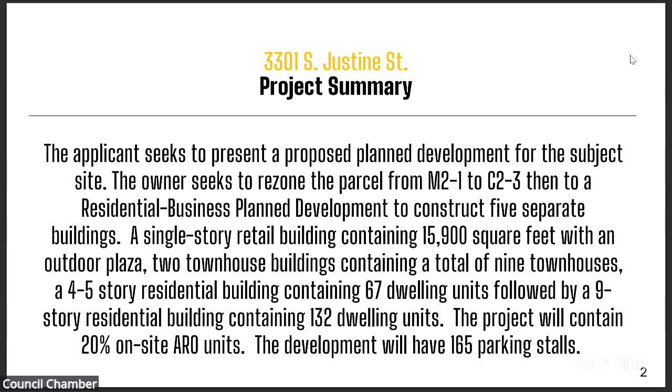Plan development review and approval is required for residential developments exceeding 60 units of multi-unit or mixed housing types in a C2-3 district. The subject site is located in the McKinley Park community area, which has a population of approximately 15,400 people. The site is currently improved with a vacant industrial warehouse and associated surface parking. The surrounding land uses include light industrial to the east and south, commercial to the north, and residential to the west.

The site is approximately within half a mile of a CTA Orange Line station and is served by CTA bus routes along South Ashland Avenue and West 35th Street, qualifying the site as a transit-served location. The site is not located within an industrial corridor as defined by the Chicago zoning ordinance.

I'll now turn the presentation over to the applicant team to discuss the details of their proposal.

Good morning, Commissioners. My name is Tyler Manic. I'm an attorney with Schain Banks, Kenny and Schwartz, the land use attorney for the applicant. Before going into the slides, I wanted to take a quick moment to introduce the development team. To my left is Ben Kennedy with Kennedy Mann Architecture, who will shortly share the design of this project. Also with the project development team is Sharon Wong. To my right, Jack Chongus with the development team, and Luay Aboona with KLOA, who will act as our traffic consultant and will be available to answer any questions at the conclusion of this presentation. So with that, I'll turn it over to Ben Kennedy.

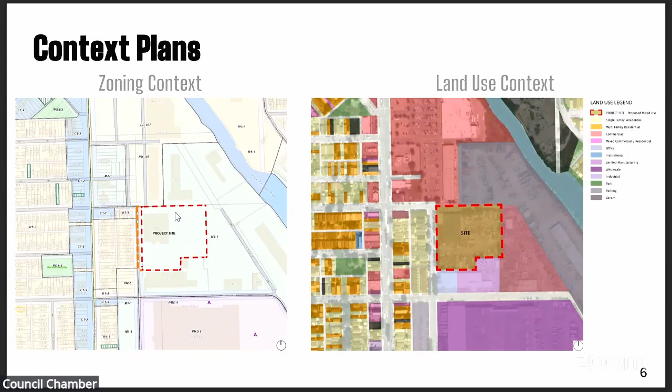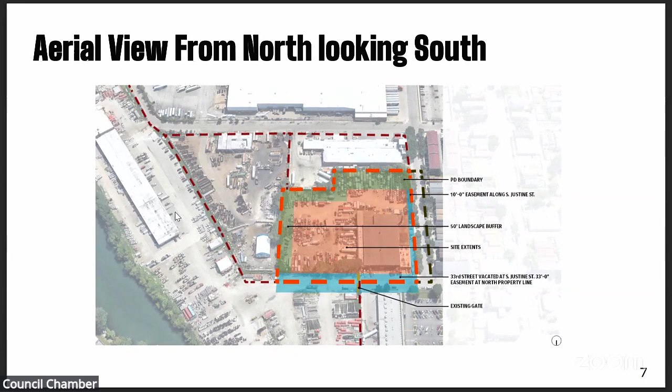Again, Ben Kennedy, Kennedy Mann Architecture. We're the architects for the project here. Here's an aerial image of our site looking from north to south. We have a 10-foot easement along Justine, a 33-foot easement along 33rd, and we're going to have a 50-foot buffer along the south as well as the east of the site. From a site context plan, our site overall is about 232,000 square feet. We have single families and 2-flats across the street along Justine. This plan and all other drawings in this presentation have north facing up. We have retail and manufacturing to the north, as well as manufacturing to the east.

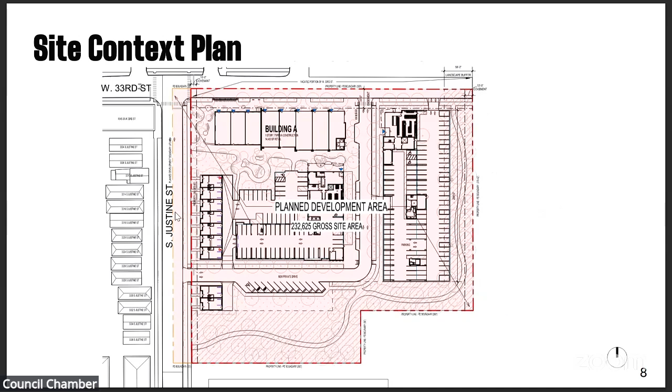So the revision now has a height characteristic more fitting of the neighborhood. Along Justine, we've taken away the parking, and there's no retail along Justine. We have 9 townhouses directly across, and those townhouses are a typical 3-level townhouse, roughly 28 feet high. That starts to mimic some of the heights we have on the west side of Justine, where we have singles and 2-flats. We've gone down to 1 retail building at the north, but we've also pushed it off the property to have a landscape buffer at the corner.

And then we've gone down to 2 residential buildings. The L-shaped building in the middle is a 4 and 5-story building, and to the east is a 7 and 9-story building. So both of those buildings step as they go up. Additionally, we ended up including a 50-foot landscape buffer to the south and to the east, and we added more property into the project on the south to have an even larger landscape buffer along the south.

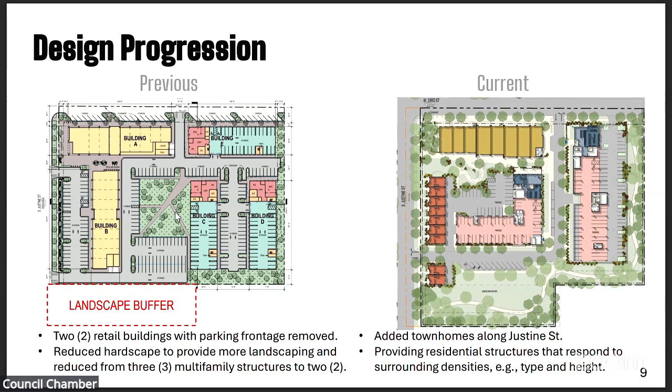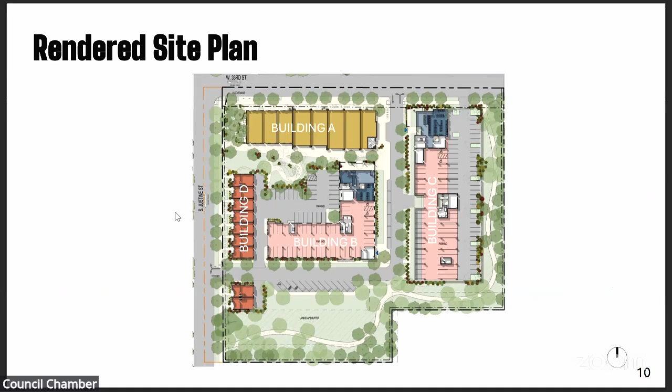This is again the proposed plan. We have building A as our retail, building B is our 4 and 5-story residential, building C is the 7 and 9-story residential, and building D are our 9 townhouses along Justine.

From a conceptual rendering perspective, this is at the north side of the site. In the foreground to our right is the 1-story retail. Directly south is a 4 and 5-story residential building, and to the left is the 7 and 9-story residential building. All residential or condos as well.

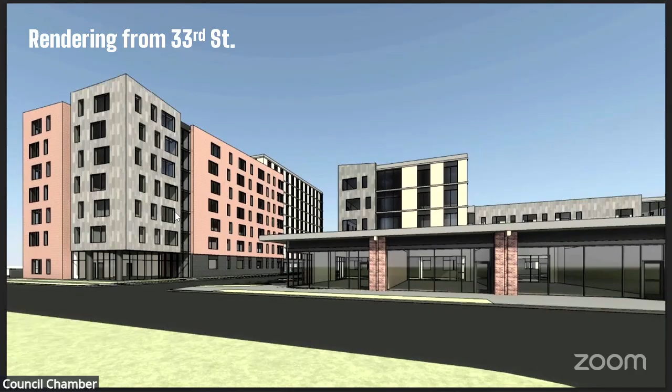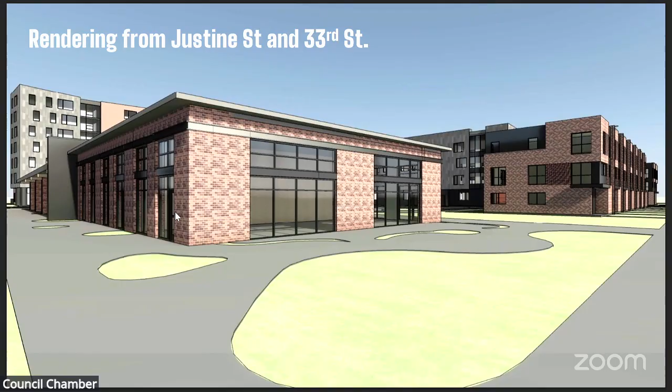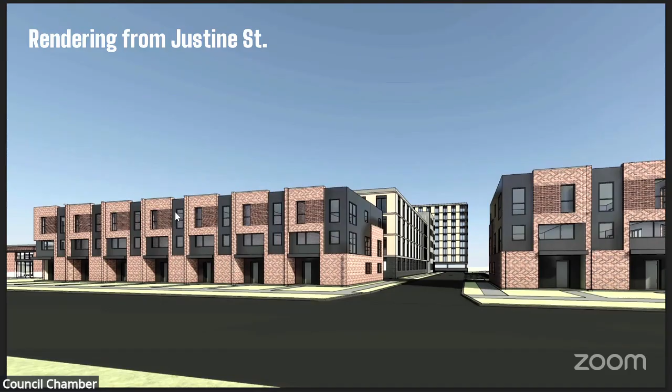This is along Justine. These are our 9 townhouses. This view is taken from essentially the parkway of the existing west side of Justine, with the existing 1 and 2 flat type of buildings. Part of the goal here was to make sure that we're hitting height characteristics, so again we have townhouses where we are lower and progress in height as we go to the east.

This is just a clip to show the height progression to the right from a sight line or height perspective. To the right is our existing buildings along Justine. This image is taken from the north, so you'll see the low 1-story retail in the foreground, and then to the far left or east is the 7 and 9-story.

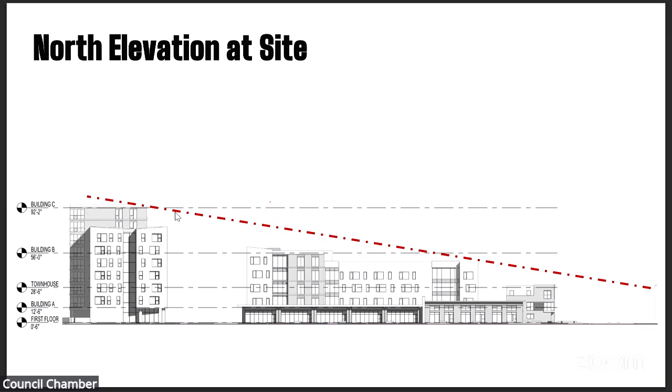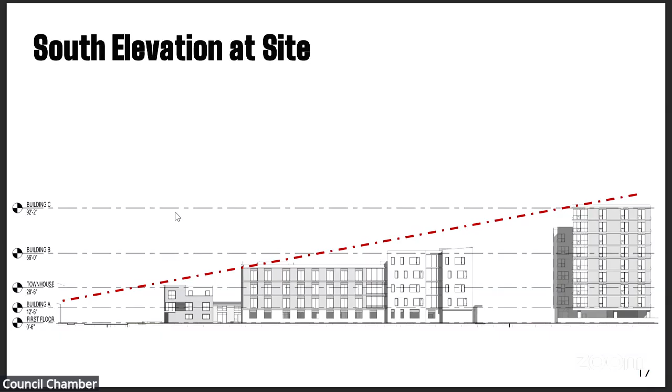Opposite view, south view, and now our existing 1 single family and 2 flats are along the left side of the screen, progressing to the east, hitting the 9-story. And then our east view of the 9-story.

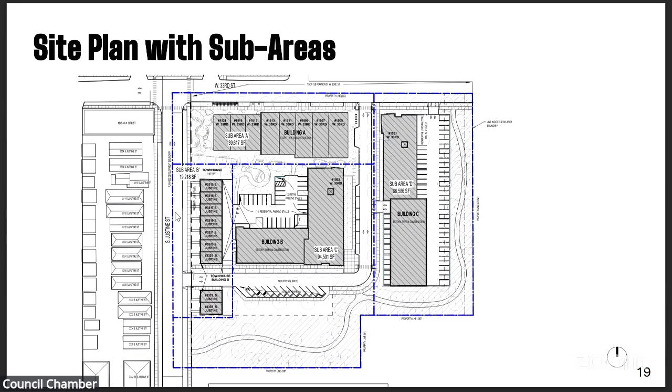Sub-area A would be our retail, sub-area B are the 9 townhouses. Those 2 are going to be built first. Then sub-area C is the 4 and 5-story building, and sub-area D is the 7 and 9-story building.

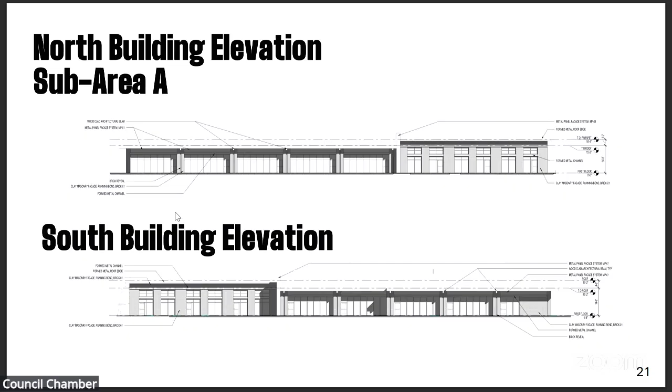Just some quick views, plans of the retail, roughly 1,800 square feet per space, a little over 14,500 square feet total square footage for the retail. The height varies in the retail, 14.5 to 18.5 heights.

More retail. And then our townhouses—we will have ARO, and all the projects Tyler will talk about a little further in the presentation. We haven't yet designed the townhouse layouts, but on the lowest portion of the slide is our first level with parking, and then second and third level. Each townhouse is roughly 2,400 square feet.

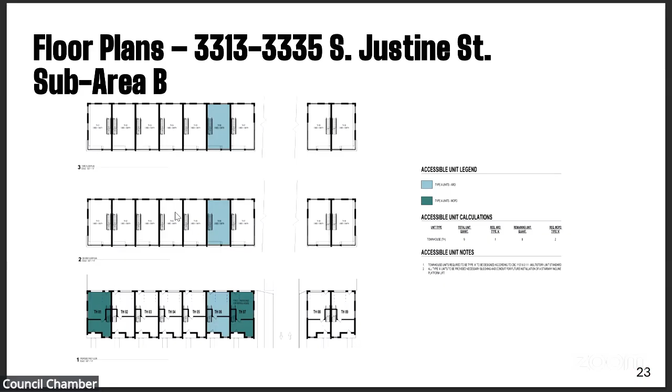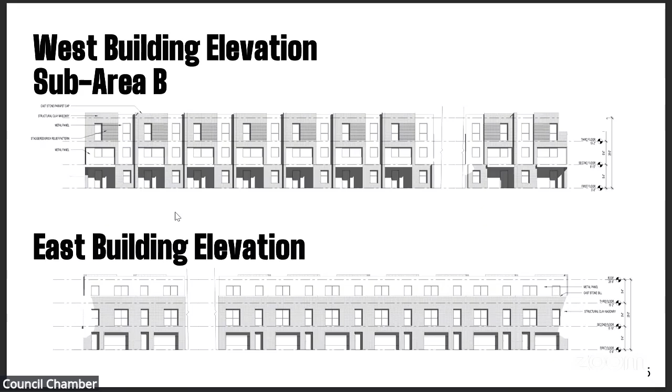Some elevations of our townhouses overall, mostly masonry and composite paneling. We'll be parking along the rear on the east side.

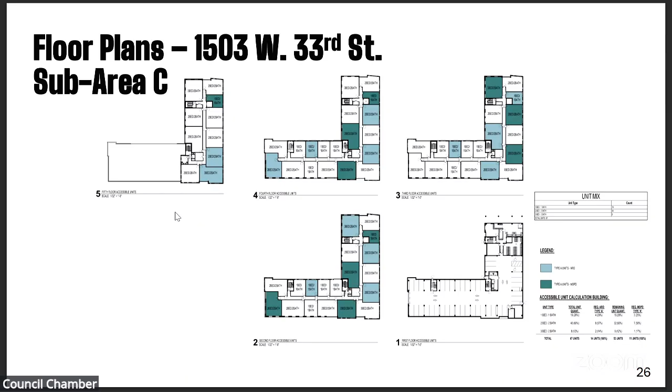Our 4 and 5-story building will be parking under on the first level. We'll have parking, 3 full levels of residential. Then on our 5th, we will pull back 1 leg, which is on the west side of the building, and our north-south leg will remain at the 5th level. Again, we're at 67 units for the 4 and 5-story building.

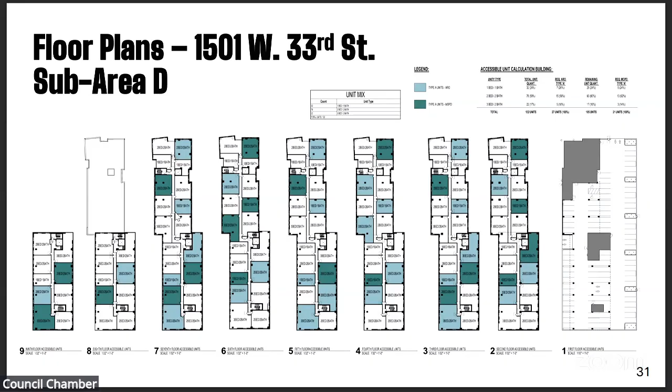We'll have 6 full levels of residential. Then we'll get up to the 8th level where we'll pull back part of a leg at the northern side, and 2 levels continue up at floors 8 and 9.

As far as materials, all the buildings will be designed in a similar character, a lot of masonry with metal panel. We'll have at least 2, if not 3, different colors of brick, as well as 2 to 3 different colors of panel throughout the building.

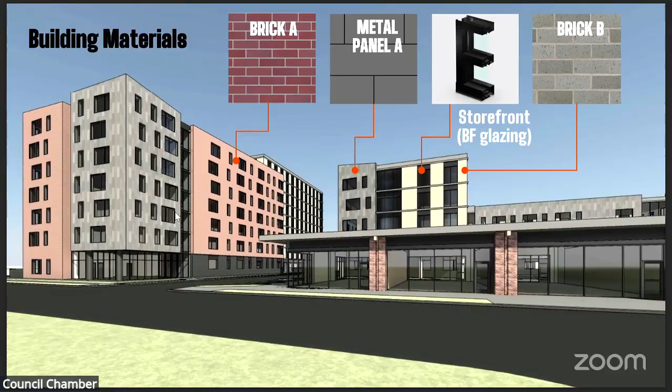Majority of the building would have typical storefront glazing, bird-friendly glazing as well. Same on the retail, as well as the townhouses.

From a transportation perspective, part of this is being a TSL development. Our closest TSL stop is along Ashland and 33rd. We will be improving the sidewalks from that intersection to our site, so we'll have new sidewalks. We'll have an APS system put at the intersection of Ashland and 33rd, as well as a new bus stop.

We'll have 12 Divvy bikes to the north side of our retail building. We'll have 208 dedicated bike parking on the overall site, with 165 parking spaces, plus additional roughly 18 to 19 guest parking throughout.

There's loading for the retail building, and there's also loading for the 2 residential buildings.

And last on this site from the open space, we will have the landscape buffer along the east and the south portions of the site.

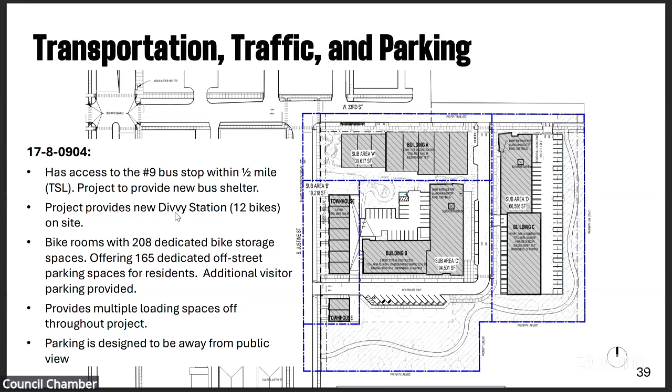From a planning context, the project targets underutilized infill sites, promotes ownership and housing choices, fulfills equitable transit-oriented developments, and expands retail diversity and services.

From an urban design perspective, the project utilizes landscape buffers for public health. Again, we have a 50-foot buffer along the south and the east.

We also have landscape buffers between the retail and the quad area, between the retail and the townhouses and Building B, the 4 and 5-story. The retail is pushed to the east, so we have a landscape buffer at the west end.

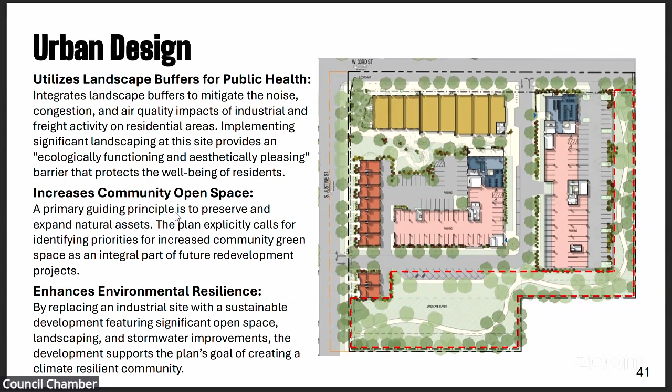There's been a traffic study done by KLOA, who are here to speak on traffic if need be.

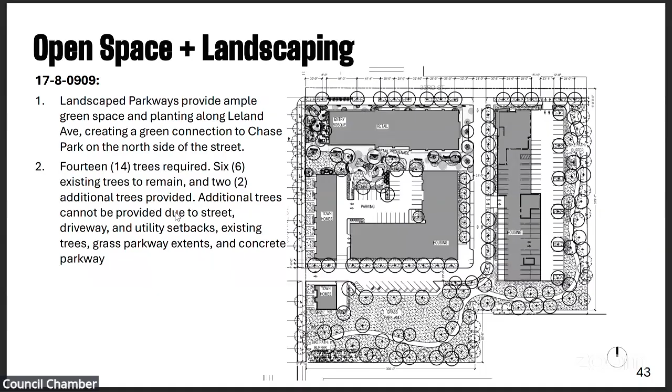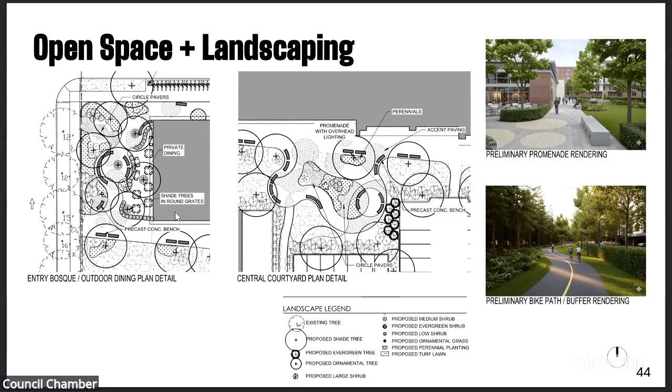More landscaping details put together.

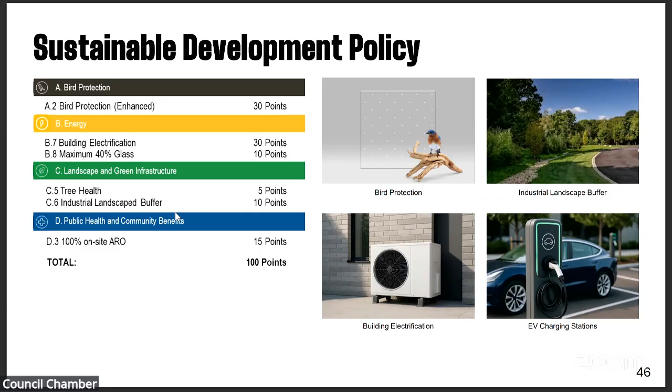From a sustainability perspective, we will have bird protection enhanced for 30 points, building electrification, full electrification for 30 points. We'll maximize glass at 40% for 10 points, tree health for 5 points, industrial landscape buffer for 10, and 100% of the ARO on site for 15, to gain our 100 points.

Stormwater, of course, we will be in full compliance with the stormwater ordinance as we get into the design. And I'll let Tyler take over.

The applicant team already owns this property, and they already have committed equity to the project, as well as been in regular communication with their traditional institutional lending partners, who are awaiting final approvals before they can formally commit to construction financing. But the intent is upon approvals to get immediately started with this project and move towards construction within a 2-year period.

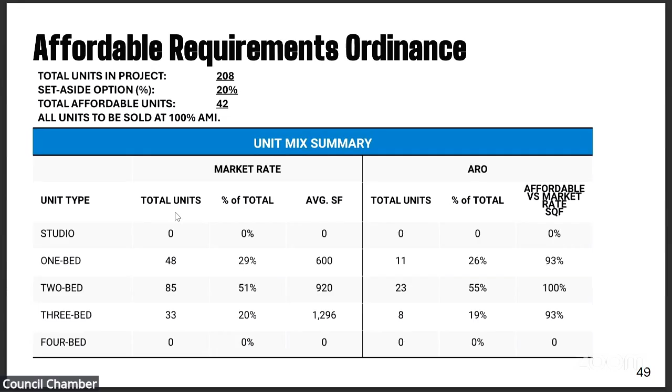The community process was robust. McKinley Park Development Council is an active community organization in this area. The community process started with meeting with the Alderwoman and her staff, who followed up with the introduction to the McKinley Park Development Council, where we conducted site visits and engaged in community meetings with the organization. Got their input, incorporated their input to the project, and then followed that up with a general public community meeting, with notice being sent to residents within 750 feet of this location.

The community meeting was well attended, and for a project of this size in this area, it was very positive. The feedback that we received was all feedback on how to improve the project versus criticisms. The constructive feedback that we received was also incorporated in this project, and we're really proud of the opportunity that this project brings to the community, and I believe the community is as well.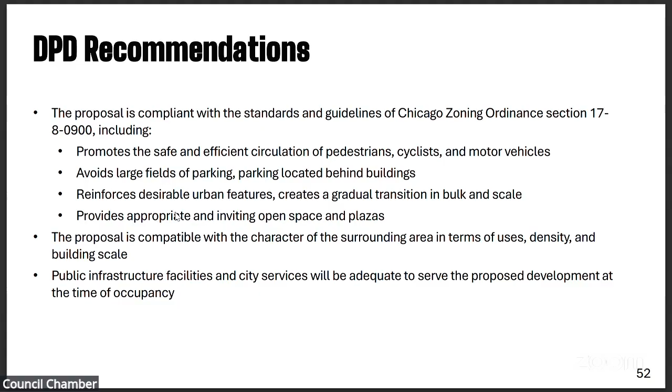Thank you, Omar. Let the record reflect that Commissioner Ramirez Rosa is in attendance now. We do have two speakers signed up to speak on this item. The first one will be Mr. Butler Adams, who's for the proposal, followed by George Blakemore, who's against the proposal.

Yes, for the record, my name is Butler Adams. I am in favor of this proposal. I got a chance to go to the community meeting last year in April about this project, and I was for it then, I'm for it now. Building on land that is currently generating very little tax revenue is a good thing. This project will add to the built environment of the area and add a diverse housing environment to the area as well.

In terms of the architecture of this project, I know it was mentioned that the mid-rises are going to use different color bricks. With all these townhomes, it would also be nice if you use different color bricks for the townhomes, just so they have a little bit of visual diversity. One of my running jokes is, if you go home drunk, you're not going to know which one is yours because they all look alike. So having a little bit of diversity in the architecture of the townhomes, I think, would certainly be beneficial.

It was mentioned that over about 10 years, this overall build-out project is going to generate about $20 million, so that's $2 million a year. That's a good thing. Let's see.

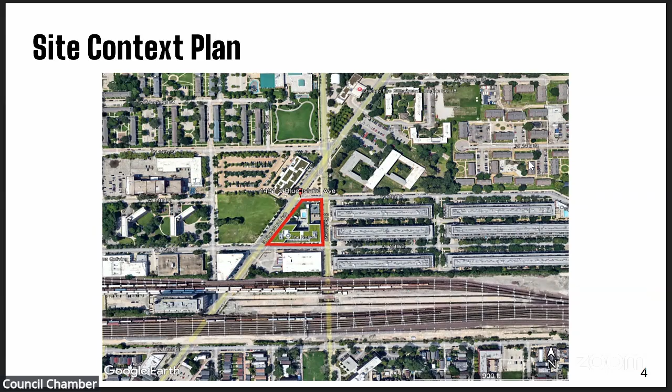The surrounding land uses for the area are primarily residential and commercial. The surrounding zoning districts for the area are planned development, C1-2 Neighborhood Commercial District, B3-5 Community Shopping District, and M2-2 Light Industry District. At this point, I'll turn it over to the applicant team to discuss the proposed PD amendment on the following slides.

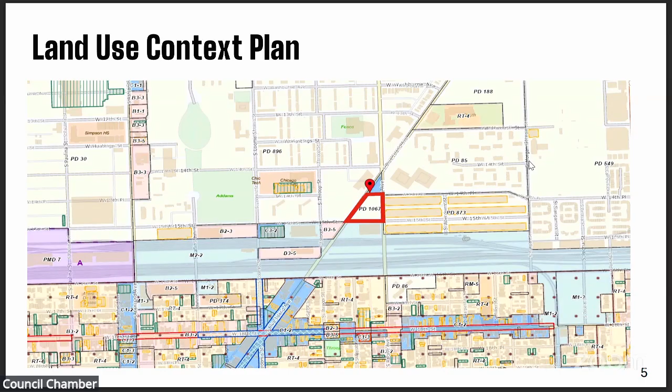Thank you, Louis. Good morning, members of the commission. My name is Lenny Asaro. I'm a partner at the law firm of Taft, Stettinius, and Hollister. I represent the applicant, Cedar Street. Along with me today is a representative from Cedar Street, Andrew Berry, an associate with the owner of the property.

As indicated, this is PD 1067. The original PD was approved in 2007. There was an amendment last summer, thank you to the Plan Commission and City Council. That amendment allowed for the activation of the retail space at 14th Place and Blue Island. That space, I believe, is going to be opening within the next few months, and that's going to be a beverage and liquor store with a tasting room, a tavern, and a patio. So that's going to be soon activated.

The net site area has been indicated as 54,027 square feet. There's 202 dwelling units in this building, otherwise known as the Rosie. There's 132 parking spaces. Next slide.

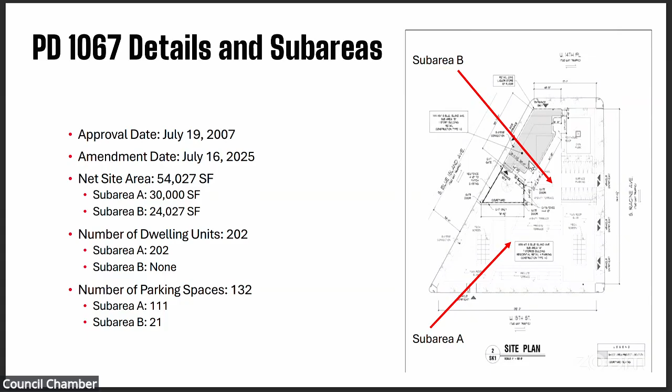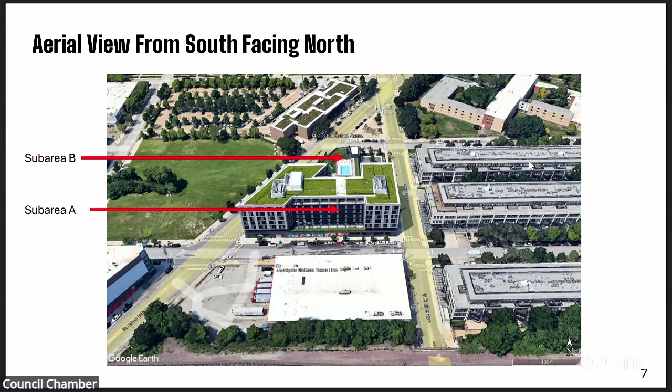The next slide is an aerial view, south facing north. The property is divided into two sub-areas, sub-area A and sub-area B. The amendment today involves both sub-areas in terms of adding uses, but there's one more vacant retail space, which is in sub-area A. So at the corner of 15th Street and Blue Island, there's one vacant space. The next slide is an aerial view from west facing east, again showing sub-area A and sub-area B.

Next slide is a pedestrian context. This is the northwest corner of sub-area B. What you're seeing here is the space that is going to be activated very shortly with the liquor store, the tasting room, and the patio that fronts Blue Island.

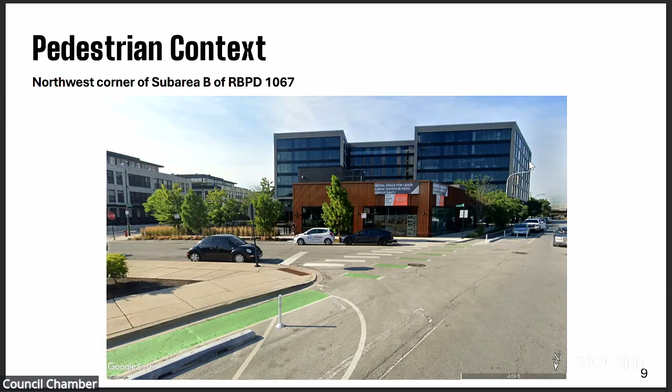Next slide is a pedestrian context from the southwest corner of sub-area A. This is the space right now that is not activated. The good news is that the owner is in negotiations, hopefully close to concluding, with a dental office that would be occupying that space.

The reason for this particular amendment was to add uses that are already permitted in the underlying zoning district, to really basically give the building, the property owner, and the community more flexibility, so that when tenants do surface or are interested in the space, it's going to be a lot easier for the property owner to lease this space. There was difficulty before, which is why we had to come before you last year, and now we're trying to basically correct all that to keep these spaces activated and occupied.

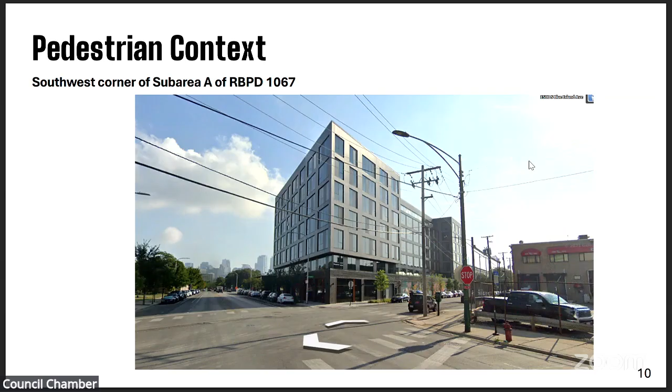We appreciate the alderman's support of our amendment last year, and it's my understanding he submitted a letter of support this year as well.

Alderman Sigcho-Lopez. This is just the site plan that's already part of our PD amendment that was approved last year.

With respect to community benefits, at this point, since we don't have a tenant under contract, we don't have any total project costs. It's going to be a dentist office. The build out certainly won't be to the level in cost that was necessary for the other space that's going to be activated soon, but there's every desire and commitment to meet the levels for this particular project.

And I believe that concludes my presentation. Thank you for your time.

Thank you. We do have one speaker signed up to speak. He may have stepped out. Mr. George Blakemore? He stepped out, right? Okay.

Then I will open it up to the commissioners. Are there any questions or comments on this item for the staff?

Yeah, Commissioner Curtis? I just want to, I'm sorry, could you point out the area where the dentist office was going to be?

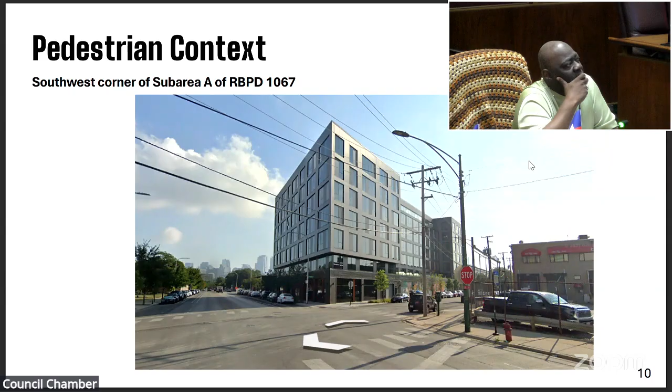Absolutely, Alderman. This is the southwest corner of sub-area A. So this space right along here, which fronts Blue Island, is kind of almost at the corner.

Any other questions? It's about 2,000 square feet. Yeah, I grew up in that area, I know the building well. Okay, all right, thank you.

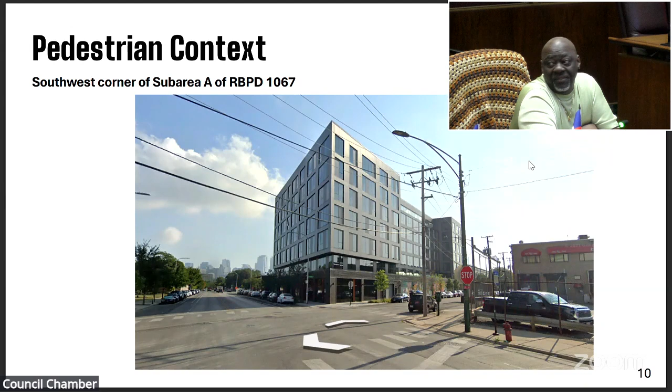Great. Mr. Blakemore, we did call your name to speak on this item. Would you like to do it now? Thank you.

This developer and development. I put on Facebook by 3 a.m. this morning how rich Chicago is and the population is increasing. Oh, she's rich, but I use some other language, other terms. Sitting on Lake Michigan, the Chicago River, a global city, a rich city. People come to Chicago for their sports and everything. Chicago is rich. Go to the ghetto, go to his ward, go to the ghetto, and do you see any economic development there? Stop beating up on these white folks, they are part of your kin folks. Beat up on these blacks, beat up on these black faces in high places selling black people out. Stop beating up on these white folks, they are still your kin folks. Beat up on these black ones, beat up on them. And community involvement? No. Where's the people from the community here? You said you have community participation, where are they? How many people attended these community meetings? Where's the alderman's people? Why don't you mandate that someone come to the Chicago Planning Commission? The alderman must be present, or one of the alderman's representatives must be here. How many people attended this community meeting? How did they vote? Do you have statistics to show the community actually voted for this project? When did they meet? How many of them met? How did they vote? Do you have the vote? The involvement? No, because you don't want it. The planning commission for this, because they feel like it's not important. It is important. So I will speak on every one of these items, and I'm going to focus on these black faces. Go to the ghetto, go to your community, high crime, abandoned buildings, vacant lots. Go there, no economic development. You develop your own community, no store, no nothing. And what is happening? Black people are exiting Chicago, leaving Chicago. I will speak on these other items also, and thank you.

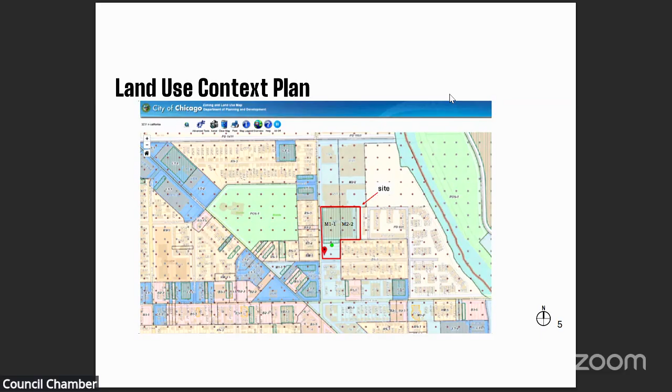Both California and Belmont, which is immediately south of the site, are designated bus lines per the Chicago TSL ordinance. From a zoning standpoint, as James stated, the property is currently zoned M1-1 and M2-2. It has been vacant for a good decade. I believe it was previously used way back when for the Cretors popcorn factory, where they made the glass carts that pop popcorn, but they abandoned the site many years ago. Since then, it's been out on the market with no takers. Residential seems the most logical reuse of this property.

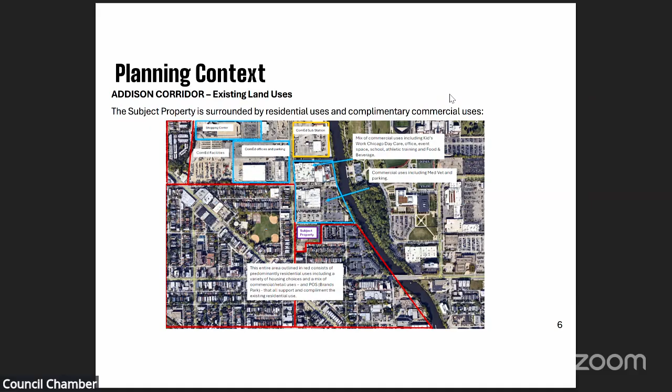A bit more on the site context, which I mentioned previously. The red outlines indicate the residential areas near the site. The blue outlines show you the commercial areas near the site, and the yellow outlines are primarily the industrial ComEd substation, the most significant one, on the south side of Addison, north side of Roscoe. Immediately north is the vet facility, with the parking lot surrounding it. North of that there are some industrial buildings, a venue space, and the Chamberlain College. This was previously the WMS campus, where, for those of you who know video games, Mortal Kombat was created. But since then it's been vacated and converted to commercial uses.

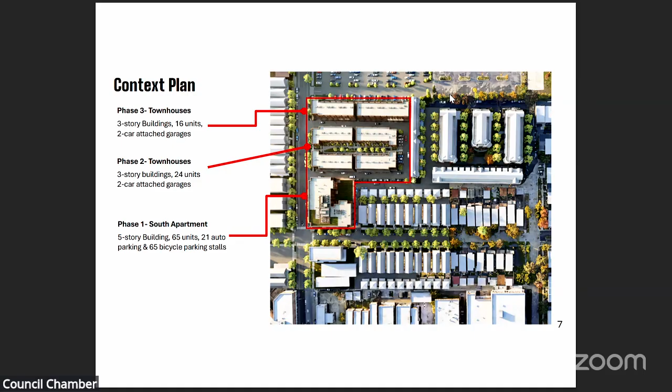The proposal is the result of an extensive year-long process involving 2 large community meetings and extensive outreach in the community, and has gone through various iterations. It first started with 2 multifamily buildings. We took that to the community. We had 156 units total at that time and a lower parking ratio. The community asked for lower density in the residential development and a higher parking ratio, and that resulted in the plan you now see, which has 3 rows of townhomes along the north portion of the site, totaling 40 townhomes, and 1 remaining multifamily building at the corner of Melrose and California, a 5-story, 65-unit building.

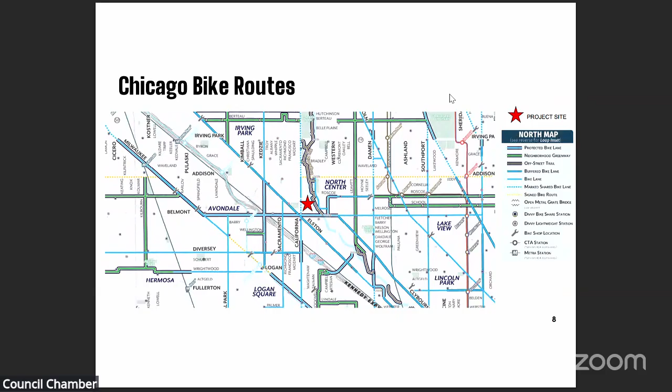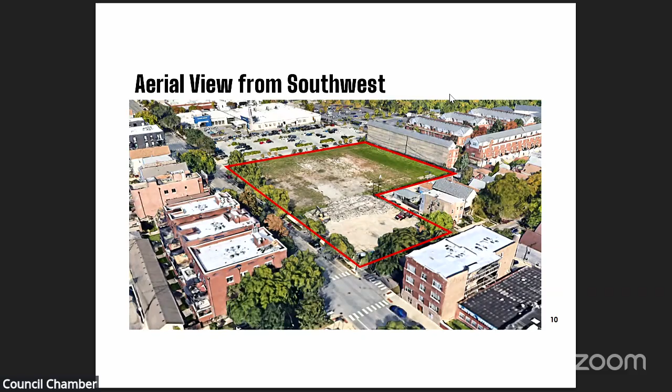Again, another photo of the context. You can see the townhomes immediately to our east, kind of low density, single family, 2 flat, 3 flats to our south. To our west, there's some 6 flats, but lower density, hence the townhomes concept. Multifamily building immediately to our south on Melrose, which is consistent with our proposal.

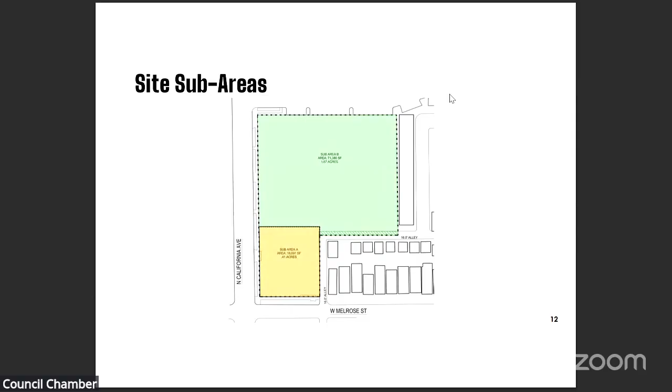We also have no access there. This was a request of the neighbors. All access to the site comes from California Avenue. They did not want any direct access to that, fearing cut-through traffic would impair their use of it.

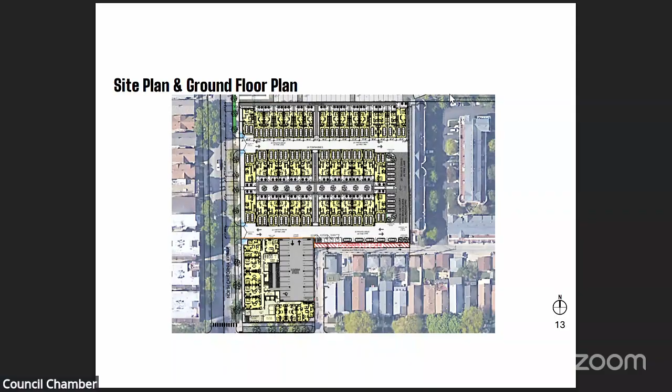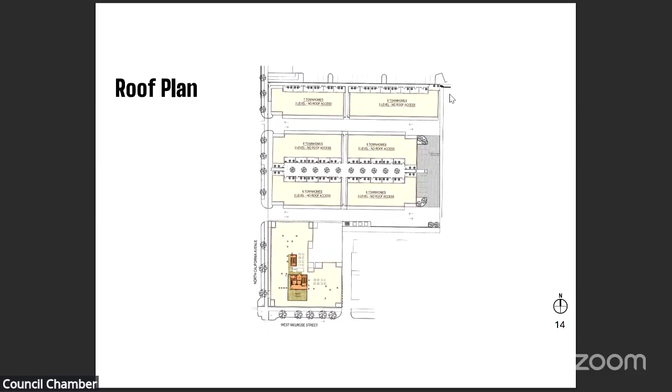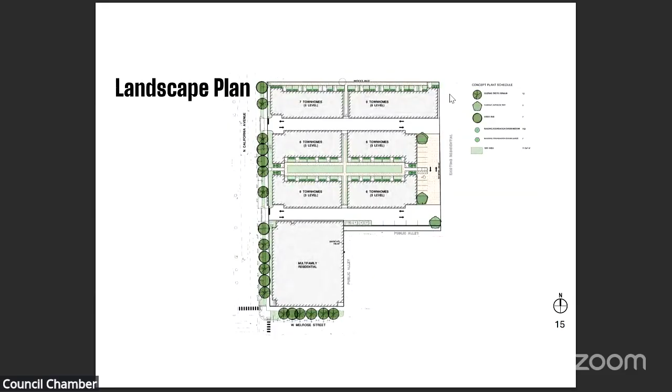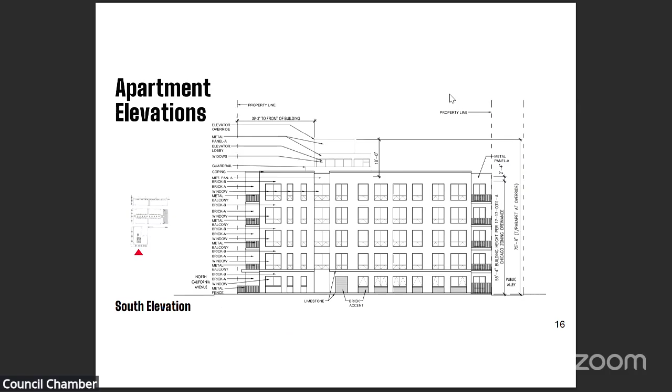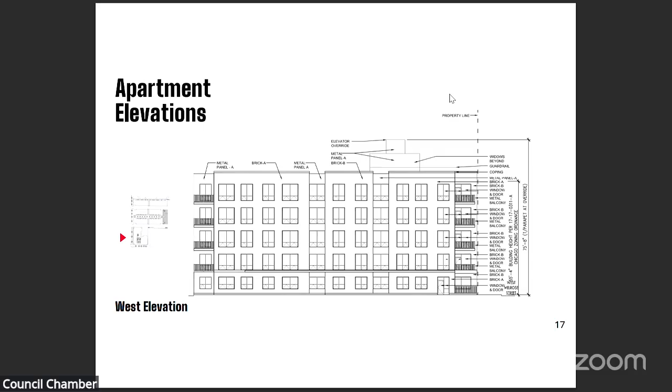Turning to the west elevation, or the California elevation of the building, this will also have the front door of the building. At the request of the neighbors, they did not want the front door on Melrose for fear that FedEx, Ubers, Lyfts would stop on Melrose and impair traffic flow. So the front door is placed on California, and it's envisioned that there will be 2 loading zones in front, a 2-car loading zone in front of the door to allow for those Uber, Lyfts, FedEx, etc.

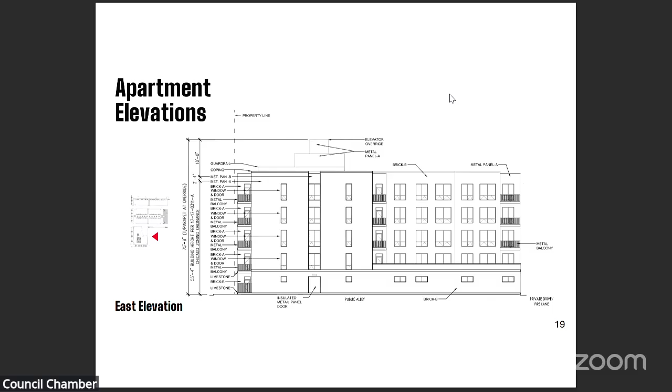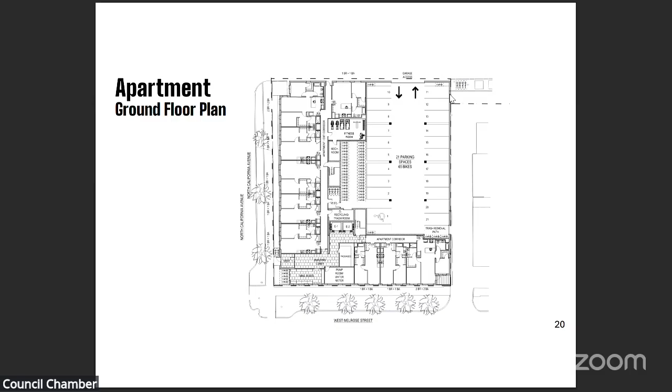This is the ground floor plan for the apartments. Parking to the back, access from the U-shaped driveway that I previously described. And you can see there's units on the ground floor activating both the California street frontage as well as the Melrose street frontage.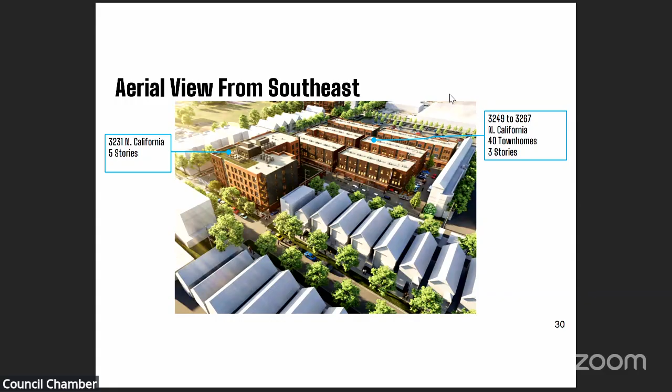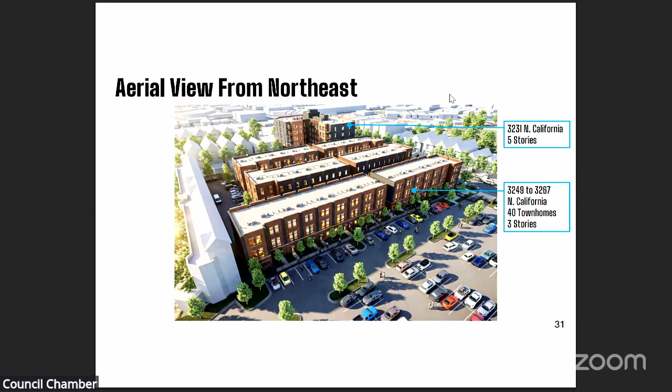Looking northeast from the northernmost building of the townhomes, looking south towards the multifamily building. Again, you can see the consistency in height and unit type or building type as you look at this plan, as well as the brick materials with the metal panel accents.

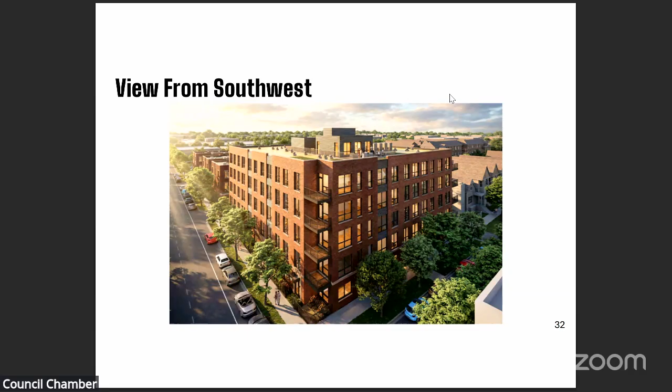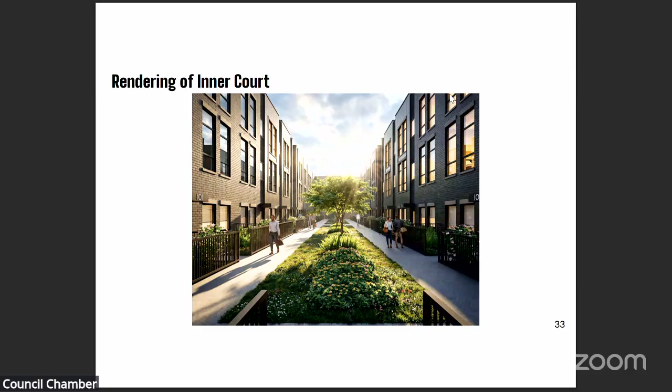Just a view of the multifamily building at the California Melrose corner. This is the green space between the 2 center rows of townhomes, showing the separation. There's about 20 feet of separation between the townhomes here, with a nice green belt along the middle and sidewalks on each side.

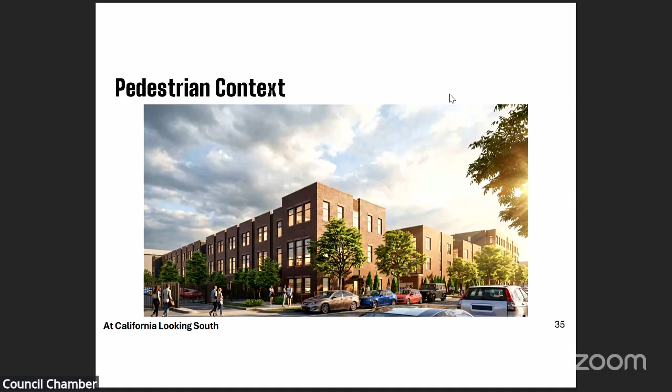Pedestrian context along California, looking from the north at the northernmost row of townhomes, looking south towards the multifamily building on the west side of California, east side of California. Just giving you a sense of the California frontage.

This was reviewed by the Department of Planning, who suggested some foundation plantings and other plantings against the townhome buildings and some separation, and then a bit of a brick wall that you see here as you enter that center court between the 2 middle rows of townhomes. Again, there's a lot of street trees already in California that will be preserved, but to the extent there's any gaps, those will be filled with new trees.

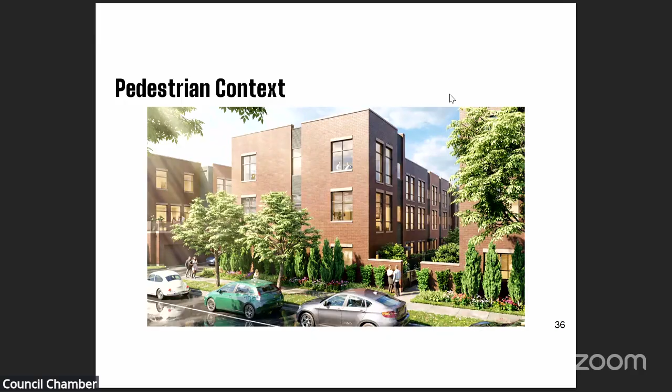Transportation and traffic. Essentially, we use in California, it's been reviewed by KLOA as well as CDOT. They don't see any major impacts on the existing traffic. The California, as it hits Belmont, is a multi-cornered intersection because Elston approaches there also, but traffic tends to clear during the rush hour. Obviously, with a residential project, our impact is less than it could be if this were an office type of use or some kind of industrial building.

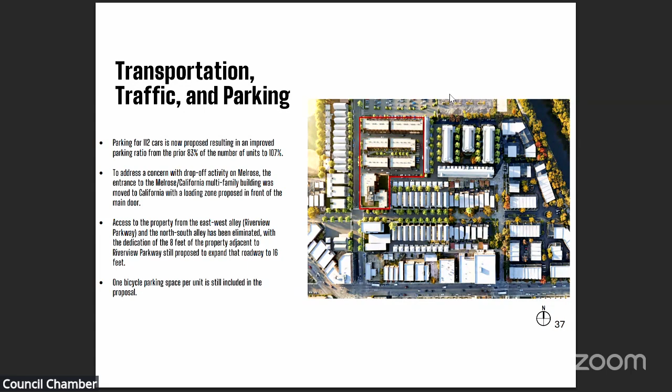Open space and landscaping, I think I've covered that previously, along the perimeter, along the green belt between the townhomes to the north side of the townhomes, with the contemplated permeable pavers along the east side of the U.

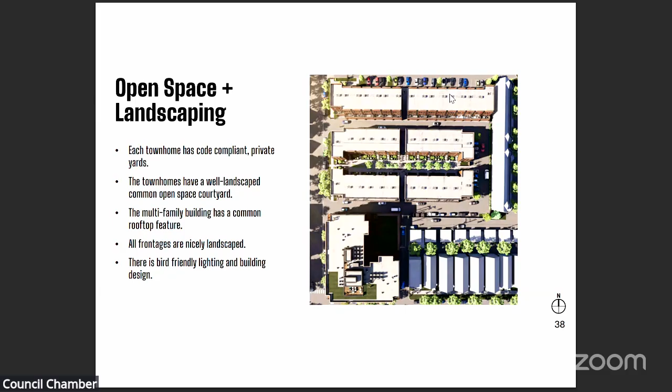Building materials: you can see the blending of metal panel and brick here to provide some variation in the facade, as well as the changing of colors in the bricks themselves to sort of separate the facade into segments.

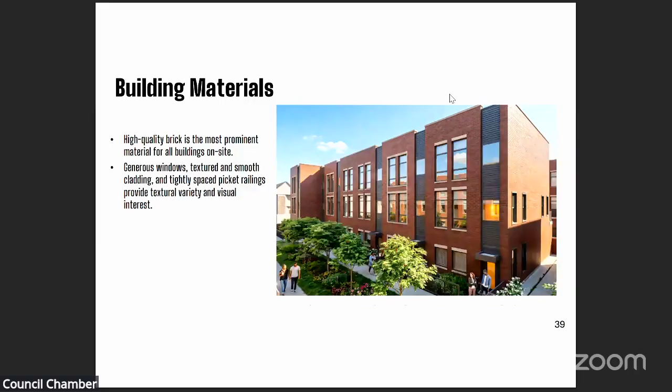Sustainable development policy, meeting the 100 points, and notably bird-friendly materials being used, particularly in the glass.

Stormwater management, obviously complying with the ordinance, has been reviewed by the City Stormwater Management Department. We have some green space that will offset it, but what cannot be offset through green space will be offset by on-site detention.

ARO: this project produces 21 ARO units. Because of the townhomes and the large bedroom count, we actually produce a significant number of family-size units, meaning 2, 3, and 4 bedroom units that will be affordable.

The affordable units will be spread through the various income brackets of 40%, 50%, 60%, 70%, and 80%. In addition, at the request of the alderman, he asked if we could add some additional workforce units and commit to them. So we've committed to 2 more, not included in the ARO but a separate commitment, 2 more units in the 1-bedroom units in the multifamily building at 100% AMI.

So the additional workforce units are actually memorialized in the plan development statements in statement number 17. So it's not just a verbal commitment, there's actually some teeth behind these.

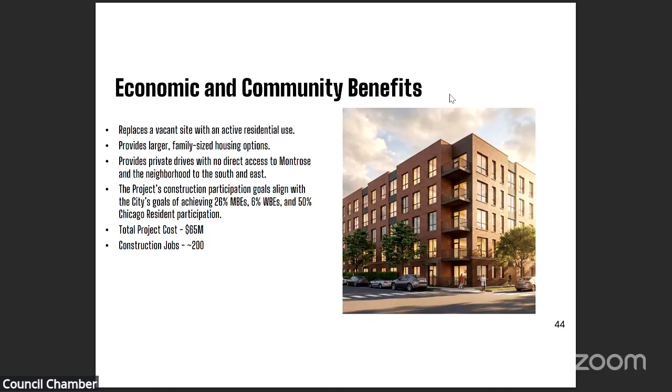With that, I turn it back over to James Quinn to give you the department's recommendation.

Thank you once again, for the record, my name is James Quinn with the Department of Planning and Development. The Department of Planning and Development has reviewed the materials submitted by the applicant and has concluded that the proposal would be appropriate for the following reasons.

Proposed development is in compliance with the plan development standards and guidelines. The proposal promotes economically beneficial development patterns that are compatible with the character of the existing neighborhood. The proposal is designed to reinforce desirable urban features found within the surrounding area. It ensures a level of amenities appropriate to the nature and scale of the project, and promotes safe and efficient circulation of pedestrians, cyclists, and motor vehicles.

Please refer to my staff report for further details on this project and the plans identified here today. Based on the foregoing, the zoning administrator recommends that the application for the establishment of the plan development and zoning map amendment be approved and forwarded to the City Council Committee on Zoning, Landmarks, and Building Standards. Thank you.

Thank you, James. We do have 2 speakers signed up to speak on this item: Mr. Butler Adams, who's for the proposal, and Mr. George Blakemore, who's against the proposal.

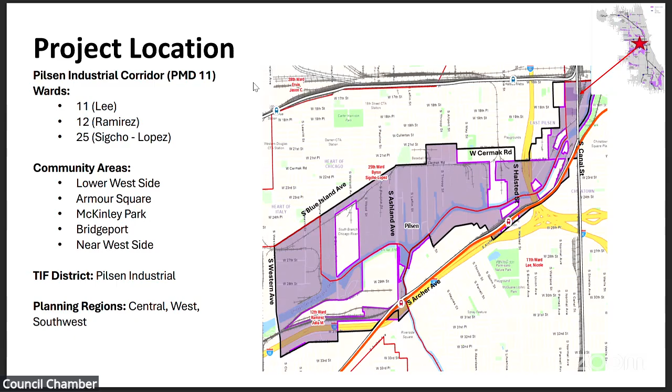There has not been an adopted land use framework plan for this corridor since it was originally established in the early 90s, so this effort is intended to provide updated guidance for future investment, land use, and infrastructure improvements while responding to the significant land use and employment changes that have occurred over time. The study builds upon the goals of the 2023 Citywide Framework Plan, as well as recent industrial corridor plan updates completed by the department, including North Branch, Kinzie, Ravenswood, and most recently Armitage. The effort will continue focusing on preserving the corridor as a strong employment center while also incorporating broader citywide priorities related to equity, resiliency, environmental justice, public health, and infrastructure investment.

The project initiated in late 2025 and is expected to continue through early next year. Early phases of work focused on data collection, corridor analysis, identifying engagement partners, and preparing the community engagement strategy. This spring and summer, we will focus heavily on public outreach, including open houses, working group meetings, pop-up events, and discussions with residents, businesses, and community organizations throughout the corridor. The input received will be crucial in drafting framework recommendations and design guidelines based on the corridor analysis and outreach completed throughout the study. The goal is to release a draft framework plan for public comment before ultimately returning with a finalized framework plan for adoption consideration.

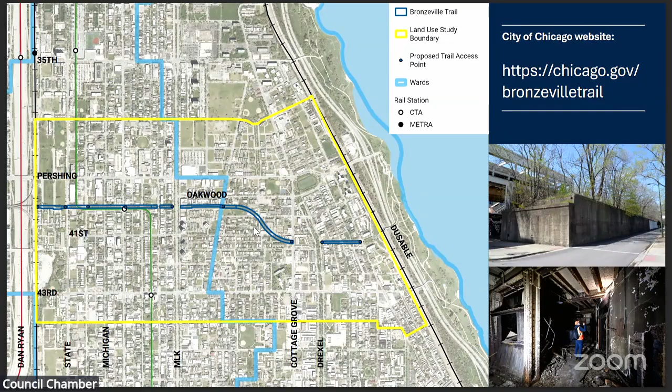Here's the timeline for the plan and engagement. The plan kicked off in the fall of 2025. Bronzeville Trail Task Force was onboarded as our community partner for this effort, and they have convened a 10-person steering committee that will be assisting with the plan. They'll be advising on content for engagement and plan recommendations, assisting in outreach, assisting in facilitating open houses and engagement, and supporting identification of focus group participants.

We plan to have 5 focus group meetings where we will be convening local subject matter experts to talk through specific themes, including trail access and connectivity, housing, economic development, and land use, arts and culture, tourism, and historic preservation.

The plan has begun looking at some existing conditions research, especially around demographics, land use, and conditions of the embankment, and these existing conditions are informing the framework plan. There are three major topics for the framework plan: a trail framework, a land use framework, and a historic framework. Regarding the trail framework, some of the significant existing conditions are that there are 4 station houses within this structure.